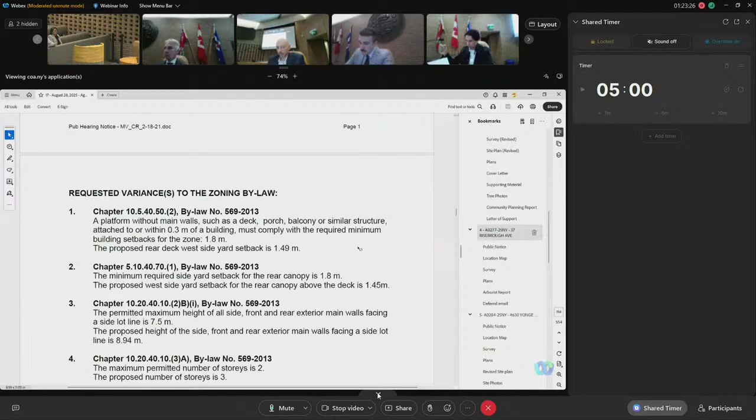All right, I understand you're seeking a request for deferral this morning? Yes, actually, one of the variances on the zoning notice is missed on the public notice, so we need to have the deferral and come back with the correct public notice.

All right, very good. Hold on there. All right, let's go into committee.

Mr. Knipfel. Thank you, Mr. Chairman, I'd recommend that the application be deferred to allow the applicant to come up with a complete list of variances. All right, do I have a seconder?

Okay, we have second, all in favor? Okay, that's unanimous, that is deferred. Second by, thank you, Mr. Marziari, for the record.

Thank you. All right, we have another deferral request, item number 7. Committee, Charlie Smith, 3 Church Street, Suite 200, Toronto, Ontario. I'm the agent for applicant for item 7, 2851 Yonge Street, and requesting a deferral today.

All right, the reason for your deferral? We've been in contact with Committee of Adjustment staff and in receipt of a city staff report, as well as various letters from the adjacent community.

And we'd like to request the deferral to take time to explore further revisions to our proposal, engage with city planning staff and the local ward councillor on how to proceed with the application. All right, hang in there.

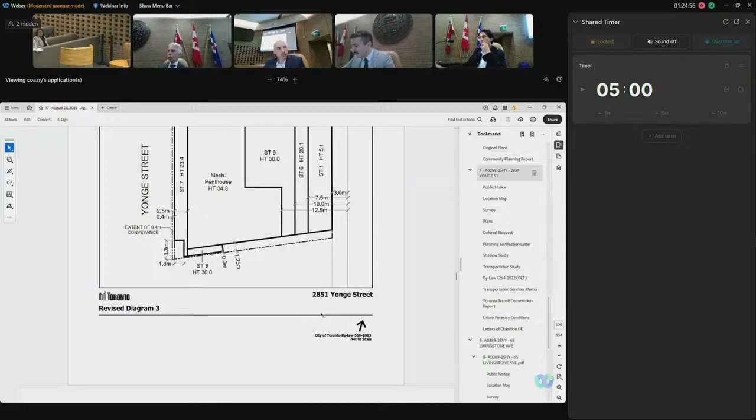We have two more residents, someone in person actually I see on my list. Is there anyone in here to speak to this item in person? Mr. Hewitt, come on down to the mic, please.

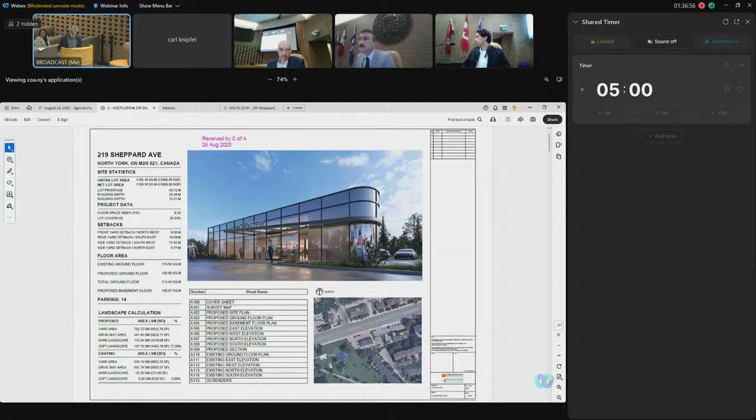Sure, yeah, staff, I can speak over the site plan, and then hopefully respond to the next page. Sorry, the site plan, I think it's going to be the next page, if they can. Yes.

In this revised site plan, we also show clearly the 2.776 meter road widening requirement. We clearly reserve that for future widening, but as part of our extension to the existing building, we still reserve it, and it's going to be dedicated when it's needed.

At the bottom right corner of the site plan, we locate the garbage bin, and the garbage is going to be stored in that location, similar to the adjacent commercial plaza on the east side of this property. They are also storing their garbage over there, and as needed, this garbage is going to be removed at least 3 times a day, 3 times a week, or even every day if needed.

That's important. The other comment they had was about food waste and storage issues regarding pest control. Definitely the owner is going to take care of that issue and maintain the site for pest control.

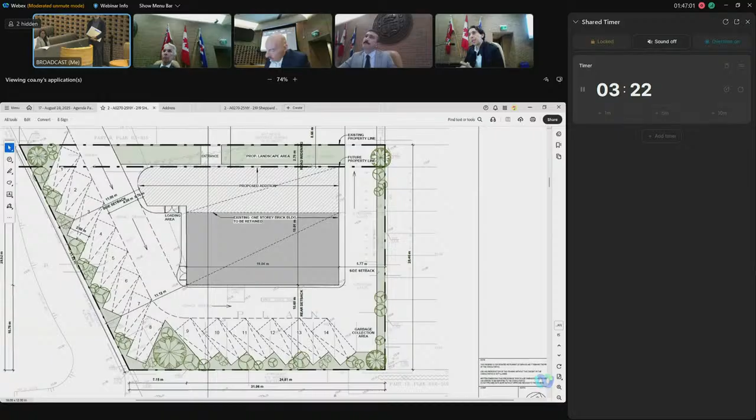Through you, Mr. Chair, I think it's a straightforward application. It's a common use along Sheppard Avenue East. There are many precedents along Sheppard, and I think it's a supportable application. So I'd like to put forward a motion to approve this application, subject to transportation condition and also TTC condition.

All right, do I have a seconder? Mr. Bartolo seconds that motion. All in favor? That's unanimous. You have your approval. Thank you, thanks for coming down today.

All right, item number 3, 28 Chatsworth Drive. The purpose of this application is to legalize and maintain the pool cabana in the rear yard and the front and rear yard landscaping. Three variances required: front yard soft landscaping, rear yard soft landscaping, and rear yard setback for an ancillary building. On file: material from the applicant, a letter of concern from 26 Chatsworth Drive, a report from community planning, and a letter of support from 27 Chatsworth Drive.

I see, yes, all right. Mr. Higgins, welcome back. Thank you for having me back. I am Peter Higgins of Peter Higgins Architect Incorporated, 69 Douglas Drive, Toronto.

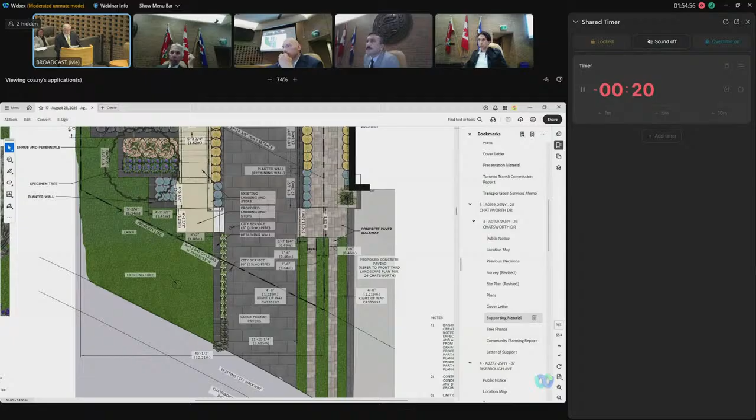So we believe that this proposal is in fact minor, and I'll just give you the numbers. I believe we reiterated them in our note. Very quickly, Mr. Higgins, just because we're over our 5.

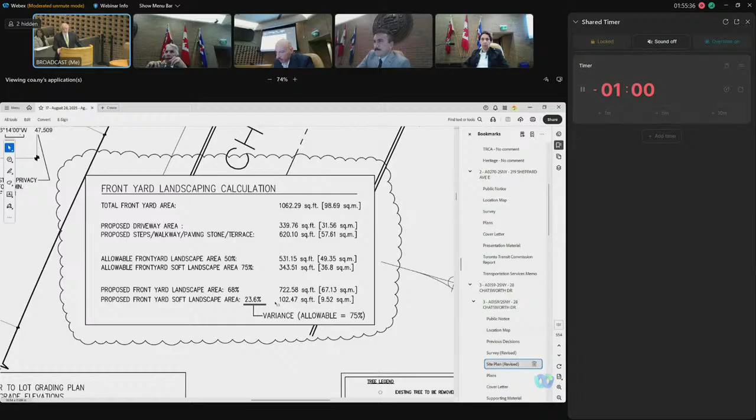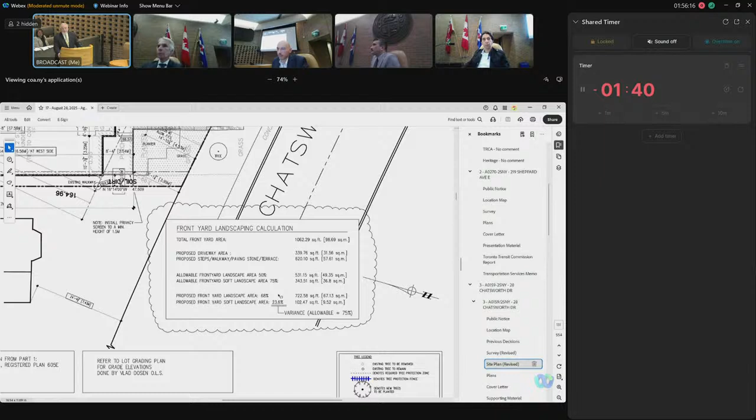All right, I'm gonna have to stop you there. I'm sure my colleagues may have a question or two. Yes, Mr. Knipfel. Thank you, Mr. Chairman. Mr. Higgins, could we get the site plan on the screen again?

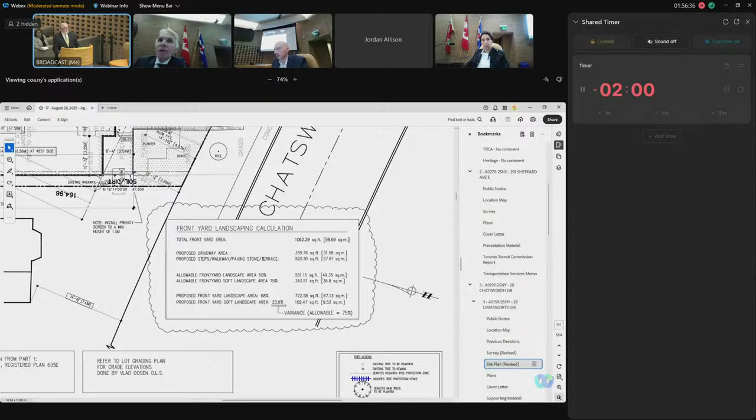The area you've noted as grass is in fact artificial turf, is that correct? And that's what the inspector saw. So he wouldn't have known it was artificial turf, he would have taken it as grass. So he didn't identify any variances relative to landscaping. Well, he did not. Okay, so if you were to remove the artificial turf from the rear yard and the front yard, would you need variances 1 and 2? Yes, because the numbers would be, as I said, 71.45, so close on the front yard. The rear yard would be 41.5, and that's because of the large patio area in the rear yard. That's the large patio area, yes. Okay, thank you.

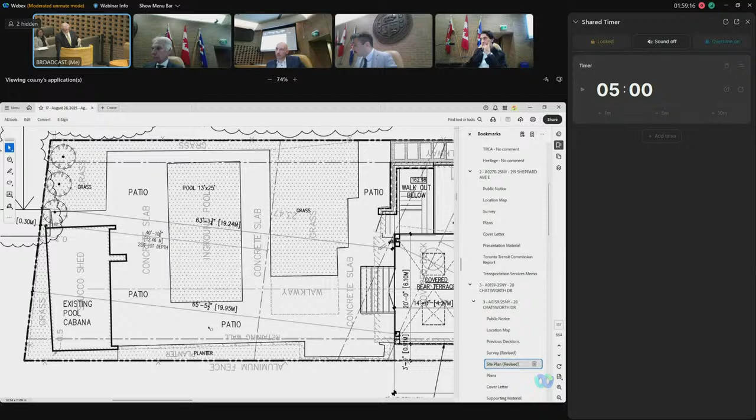I'll start it off, Mr. Chairman. I really don't have any difficulty with variance number 3, the setback relative to the cabana, particularly given the neighbor behind, the person most affected, doesn't have an objection. I do, however, have a lot of difficulty with variances 1 and 2, using artificial turf, and the percentages I just don't think are acceptable. I take Mr. Higgins' point that this wasn't done on purpose, not that that would really make a difference, but I think the applicant is responding in good faith. I'd be more inclined to suggest that variance number 1 be altered to 71.45% and variance number 2 be altered to 41.5%. It's not quite at the level of the bylaw, but I think in this case it's reasonable.

Yeah, thank you, Mr. Chair. I think I'm inclined to agree with my colleague. It seems like the applicant did try to do things in good faith, maybe got some bad advice, maybe made some incorrect submissions to the city and didn't get the required permits properly. That has happened. I think a reasonable middle ground to make all of this right is to proceed exactly like Mr. Nimfeld stated. We have a motion, see where it goes.

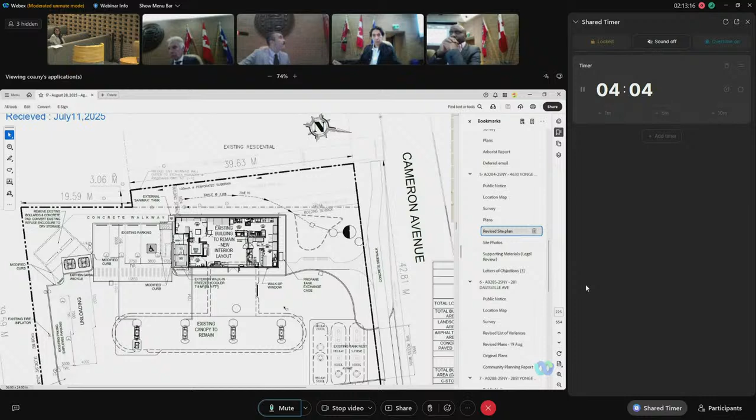We have reviewed the 3 objection letters, and I would suggest that 2 of the 3 are not in reference to what is being proposed here. One of them specifically makes reference to a proposed high-rise development at this corner, which is not what this development application is. I will say that we did have a pre-consultation application with planning staff at the very beginning of this process. They determined that a site plan application process was not required and that we needed to address simply the zoning non-compliant restaurant use for this specific C1 designation.

The last piece is the rear yard along Cameron Avenue is board privacy fenced, and there is significant mature plantings of trees. Okay, thank you for that submission. We have another speaker online.

Hello, hello, hi, can you hear me? Yes, we can. Okay, my name is Gari Shim, resident of 11 Cameron Avenue, which is directly adjacent to the gas station. So I do have several concerns with regards to this project. It's really an escalation of the existing issues that currently are there already.

The agent has referenced the green space between the gas station and my residence. There is foliage there; however, they have pruned or cut down trees that are looking directly in from the gas station's parking lot, at an elevated elevation. People can actually stand right by the fence and look into my backyard. The foliage that was once there has been pruned, and it doesn't really prohibit anybody standing there and looking into my backyard. So that's one in terms of privacy.

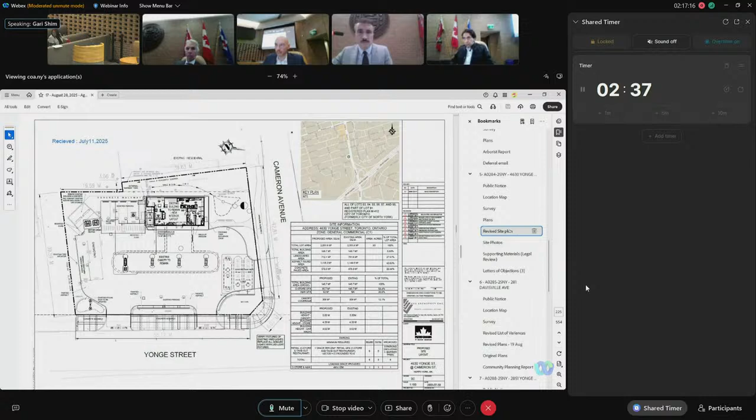Where would somebody on the applicant's property, at the gas station, where would that sightline exist? That sightline exists right by a bit of a little parking area with the garbage disposal area. If you look, it's kind of difficult to see here.

Staff have got the site plan up. Yeah.

So you can see the existing parking area there, right? There's a concrete walkway, and then there's the green space right behind it. Right where it sort of elbows in that corner there, it says external Sanimax tank there. My property borders, there's a fence there.

How tall is the fence? The fence is standard height. However, the elevation on the gas station side is higher, so it's actually shorter from a height perspective.

Are there any platforms back there that would elevate a person above the fence to look into your backyard? There is a brick platform there, and if you're over, I would say, 5 feet tall, you can look right into there. Now there are some trees there, but they've been pruned, and some have actually been cut down.

Okay. Any other questions? All right, thank you. Let's go back to the agent. I want to give him an opportunity to respond to some of the things that were brought up by the immediate neighbor.

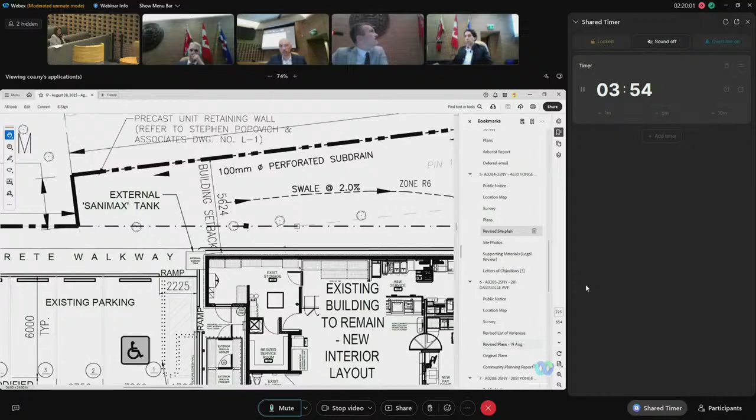Concerning the refuse system, it's a much more up-to-date version of the old bin system, where homeless and others would attempt to get into the garbage system. So it's designed to do a better job.

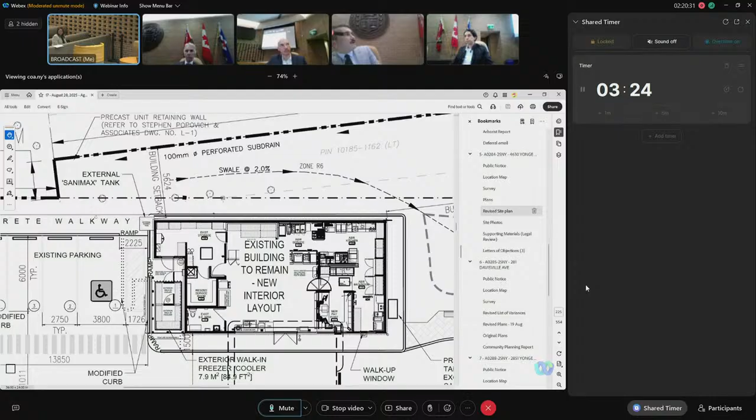All right, I'll ask you the same question I asked the immediate neighbor. In that concrete walkway, staff, if you just zoom out on that site plan, is it intended that this restaurant use is going to have anybody dining back there? Are there tables back there? Are you building a platform back there? My understanding from looking at this, who would be going back there on the concrete walkway typically? Would you have customers back there?

No. The purpose of the concrete walkway is to be able to exit vehicles, for example, and for staff to be able to get to the refuse system, which is to the left of that existing parking, to the garbage and recycling you see there. Okay, alright, I don't have any other questions.

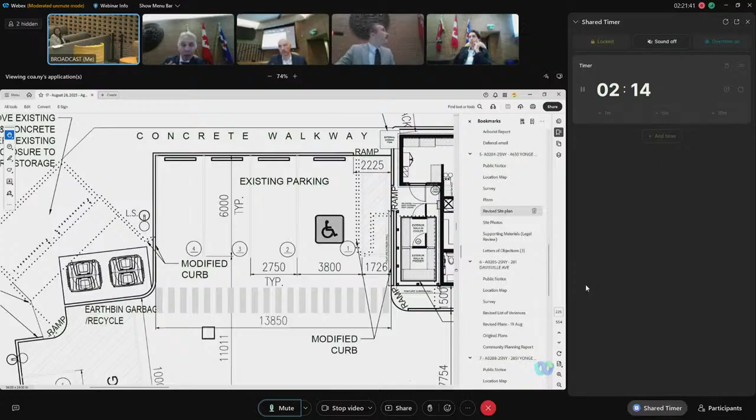Colleagues, do you have questions? Mr. Knipfel. Thank you, Mr. Chairman. Could you clarify, I understand this is a change in use and it's a minor change, but the one area that does appear to change is that triangle we were just talking about. Could you clarify, because I'm not clear, you're removing bollards and the pad, what's going in its place?

You've got to convert the existing refuse enclosure to dry storage. What is actually going to be there? And then are the recycling bins shown on your site plan, are they staying? I'm trying to identify what is going to actually happen where the dotted lines are about this new system. Is there a structure there? If so, how big is it? Certainly. And then is there still garbage recycling bins?

Okay, so certainly, today the garbage and recycling is in that storage shed. It has a roll-up door, and then the bins are moved out for the purposes of collection. That will be converted to dry storage for things such as pop, water, things which are not perishable, things which are dry for the restaurant and convenience store use. And that's today, all of that is inside the building, correct? That's a building, correct. How big is it? How high? It's roughly 9 square meters.

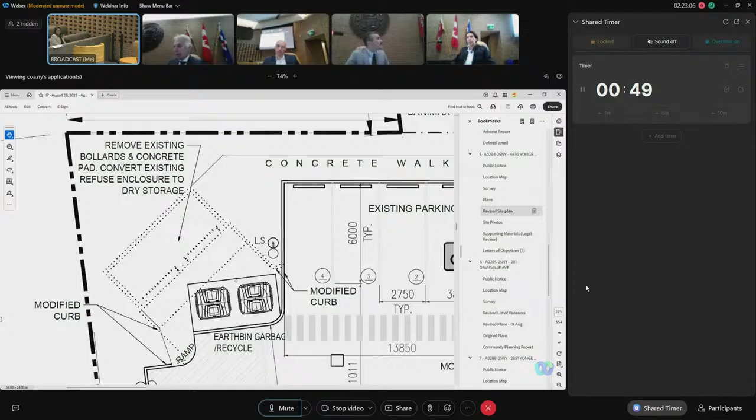Okay, and it's where the dotted lines show. Correct. Thank you. In front of that dry storage area, which was the previous refuse system, we will be putting in EarthBins. It's a product that allows recessed bins, one for garbage and one for recycling, which are picked up much like garbage bins. They are plastic, rubberized in nature, and recessed, so they would be sitting in front of that existing refuse storage area.

Okay, thank you very much for clarifying. You're welcome. Other questions? Okay. Thank you. Let's take this into committee now.

Mr. Bartolo. Yes, thank you, Mr. Chair. In reviewing this application, I don't really see any issues with it. They're not adding any space to the gas station. Restaurant use is pretty consistent in the area. It's on a main thoroughfare. Looks like they're handling the waste in an appropriate manner with, frankly, better containers than what they have now.

So I'm prepared to support this application. Other comments? If there's no comments, I'll put forward a motion to approve this application. Okay, do I have a seconder? Second by Mr. Kibu. All in favor? That is unanimous. That application is approved.

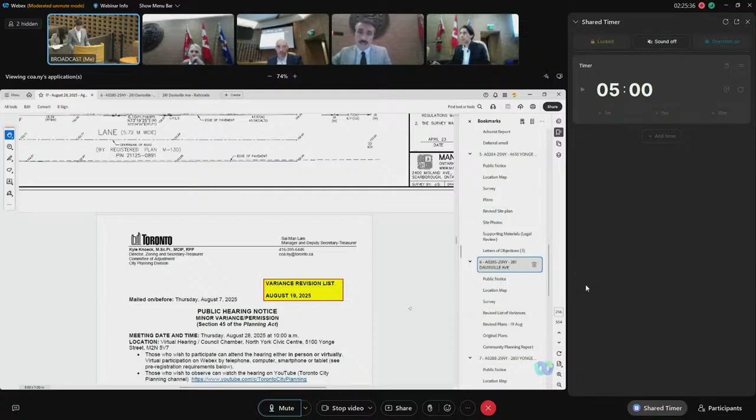The purpose of this application is to construct a 3-story fourplex and 2-story laneway suite. Variances for rear yard landscaping area, east side yard setback for a platform, front yard setback, east side yard setback, west side yard setback, building depth, setback for a rear exit stair, setback for front exterior stair, front yard soft landscaping, platform encroachment into a front yard setback, building height, front and rear exterior main wall height, and building length of a laneway suite. On file, material from the applicant, a report from community planning, we received a late letter of support with multiple signatures from area residents.

Welcome. Good morning, Mr. Chair and committee members and staff. My name is Christian Chan. I'm the agent on behalf of the applicant. My address is 157 Adelaide Street West, Toronto, Ontario.

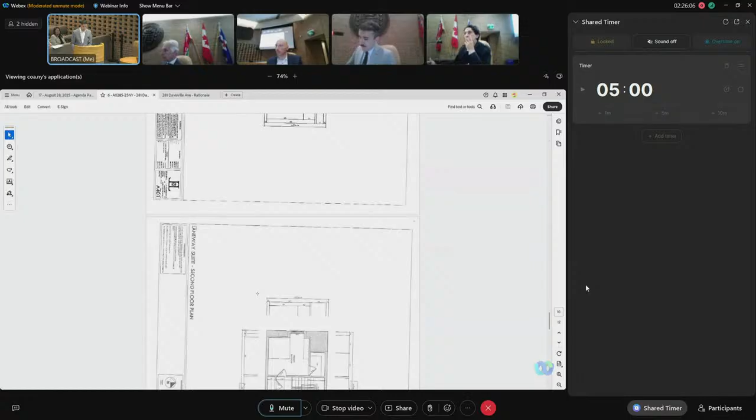And I'd just like to address a number of variances. There were active discussions between myself and Sina Sakaria of Community Planning, which resulted in a number of revisions and deletions to the variances list. I provided, and it's up on your screen too, sir, the revisions, which are also reflected in the planning staff report submitted last week, showing the modifications and deletions to the variances. So the list is contained in the staff report for the revisions. If you'd like me to go through them, sir, I can certainly do that.

Typically, we go through all of the variances from the public notice, but just before we do that, so everybody's on the same page: if I understand correctly, the modifications are in line with the recommendations noted in the community planning staff report, as well as the revised list of variances that were submitted. It's essentially a markup to the public notice, where you've noted what changed, what's being revised, and what's being deleted. That is correct, sir, yes. Okay, and that is in line with the community planning recommendations? That is correct, all except for item number 11 on the planning staff report with respect to the front yard soft landscaping, which I can go into in my presentation. Okay, so there is one discrepancy?

Yes, item number 11 that you see on your screen from the planning staff report, that is something that was new to me when I accessed the staff report when it was sent to me by staff last week at the deadline. That's an item that wasn't discussed between myself and community planning, so that's news to me, and I'll address it in my presentation, sir. Okay, very well. So staff can record the modifications using the public notice, which we'll get up on the screen. Take us through each of the variances and let us know what, if any, modifications are being proposed.

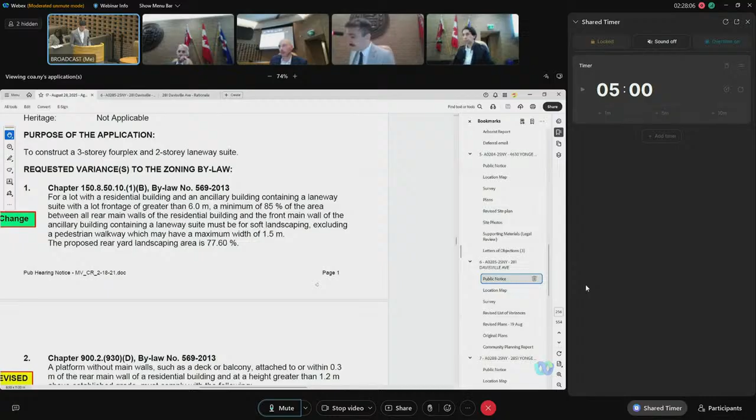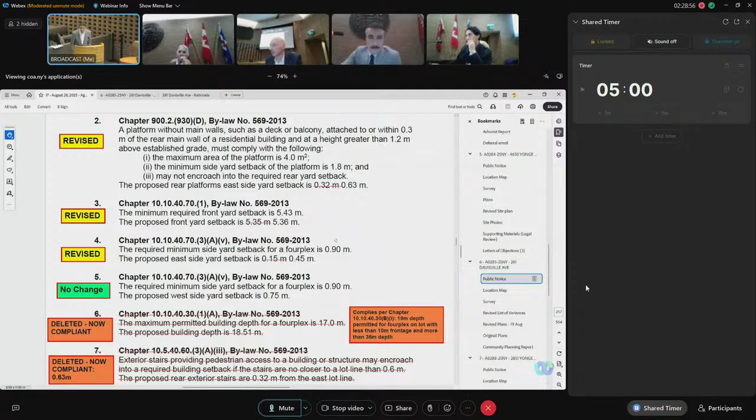Yes, so as we can see here, variance number 1, there's no change with respect to the rear yard soft landscaping area in between the proposed laneway suite and the proposed fourplex. The next item would be the platform encroachment to the east side yard, and since the plans were revised, you should have a copy of those dated August 19th, 2025, variance number 2 has been revised to reflect the increase in the east side yard setback of the proposed fourplex. Variance number 3, with respect to the front yard setback, because of some plan revisions, even though it's a very minor change, a revision to the requested front yard setback, it's going from 5.35 to 5.36.

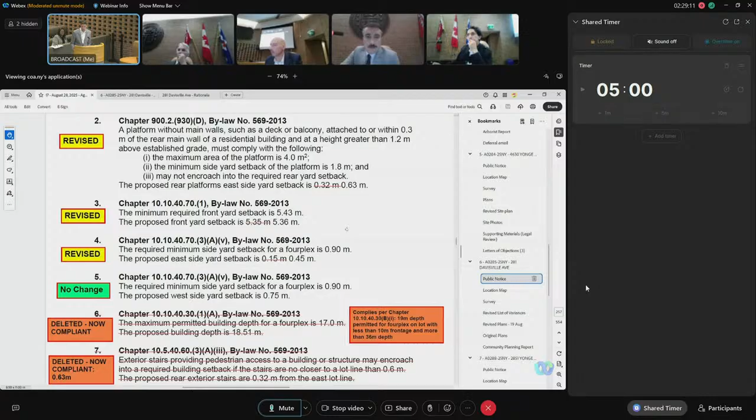Okay, variance number 4 is revised, reflective of discussions we've had. Just give us the changes, don't worry about the rationale at this point. So that's 0.45 from 0.15. Okay, variance number 5, there's no change to the west side setback. Variance number 6 is deleted, because in discussion... Doesn't matter, it's deleted, okay. Next one, number 7 is deleted. Number 8 is deleted. And number 9, sir, is no change. And number 10 is revised.

And then variance number 11. What's the revision on 10? The revision on number 10 was the encroachment of the front platform to the required east side yard setback. That's also reflective of the increase of the fourplexes. What's the numerical change for staff?

It's just right now we're doing clerical work, getting all of the changes. We can get into the discussion of planning rationale after. Understood. So the numerical changes from 0.39 to 0.84 for the required setback to the east for the platform. I also note on your submission, the platform encroaches 1.9 meters into the required front yard setback and is 0.84 meters to the east side lot line.

So there's two changes to that? There's two changes, however that's not reflected in what was provided in the planning staff report. They just mentioned one of the dimensions, the 0.84, but that's the deviation from staff. Okay, we'll get to number 10, right?

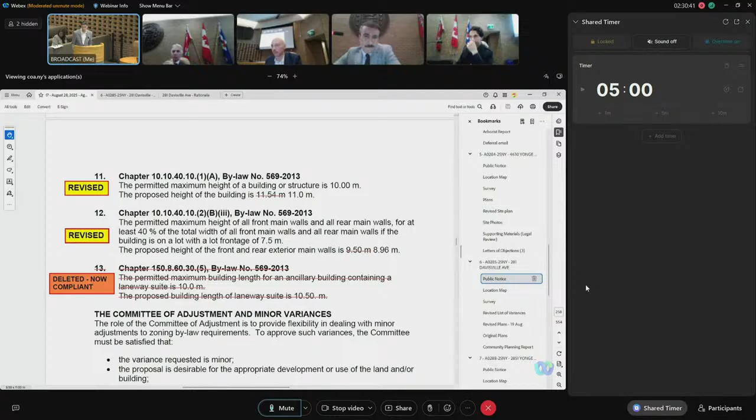Okay, and then number 11 for height, going from 11.54 to 11 meters. Revision for number 12, front and rear main wall height from 9.5 to 8.96. And then deletion of variance number 13 for the laneway suite, which is now compliant.

All right, staff, did we capture all that? I know you have it on the revised, but for good measure, we're supposed to have it on the record? Yes. There's still the one. Which one is it? Oh, from staff, the deviation? He said he didn't have it. He just got it, he didn't have a chance to.

Yes, this would be the front yard soft landscaping, variance number 9. I see, okay. And are you amending that, or is that staying? So staff have recommended in the report to go to 60% from the proposed 45, but that's something I would like to discuss. Okay, we will address that.

Okay, we've got the modifications. I think, given frankly the number of variances and modifications, a presentation would be helpful. I also think my colleagues may provide some of that rationale through questioning we may have. So you may not need a full presentation, but just to get the ball rolling, let's get the clock up, and I want to give you the floor.

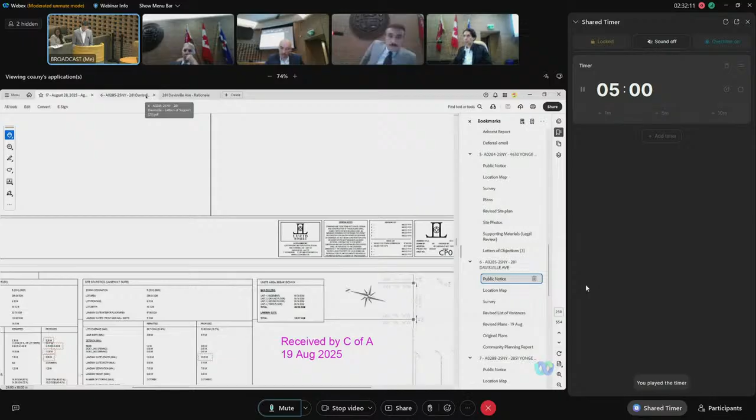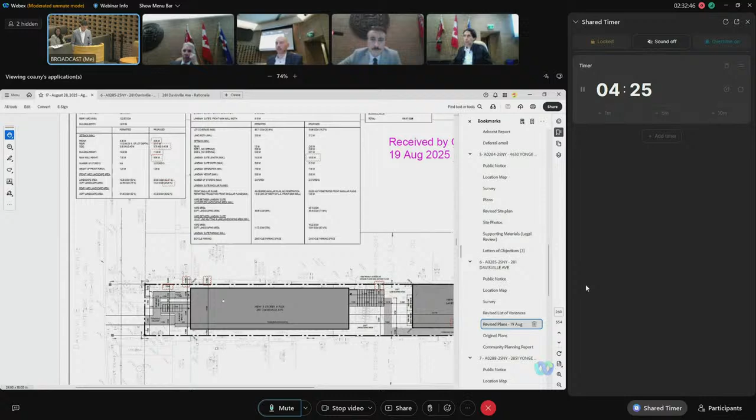With respect to the variances, I'll go into revised variance number 2 for the rear exit staircase. If I can ask staff to go to the site plan in the rear yard and show the staircase, that'd be great for the latest plan submitted. So the platform encroachment is revised to 0.63. The impact of this variance, in my opinion, is minor, as the platforms referred to in the variance are those for stair landings on the rear exit stairs and do not function as a deck or patio. They're not usable space.

They're also designed with porous metal grates, so sunlight will be able to go through this, as well as rain. And also in terms of massing, it doesn't appear as a portion of building mass because of its design. I've seen how the applicants have constructed other multiplexes with these rear staircases, and light goes through them.

With regards to the front yard soft landscaping, city planning has recommended that it be revised to 60%. I would just like to advise the committee that variance number 9 is still being sought. Sorry, I jumped ahead. Moving to revised variance number 3, the front yard setback. The proposed front yard setback is less than 10 centimeters than the required front yard setback, reduced by 7 centimeters to accommodate the fourplex.

As can be seen on the site plan, the adjacent homes have front porches that project beyond what is being proposed. With regards to variance number 4, the east side yard setback has been revised to 0.45 meters, and since there are no openings on the east main wall, this is compliant with the bylaw. However, the variance remains to be sought, and for belts and suspenders, I would not like to delete that variance.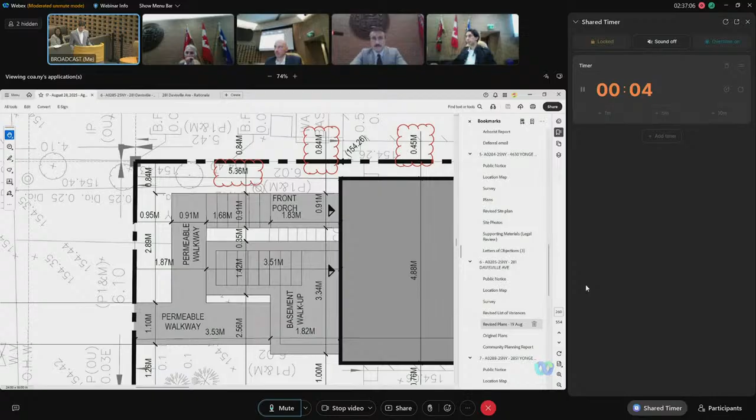If I can ask staff to go to either of the side elevations on the screen—the reduction in the impact of the height increase being sought is mitigated by the pitched roofs at both the front and rear main walls, a design that has been influenced by yourself, Mr. Allison, on previous fourplex applications that my designers have taken into account to implement.

And I think there's one more variance regarding the laneway suite, if I can ask for a brief indulgence. The proposed rear yard landscaping area is 77.6% between the lane suite and the fourplex. If I could ask staff to go to the site plan.

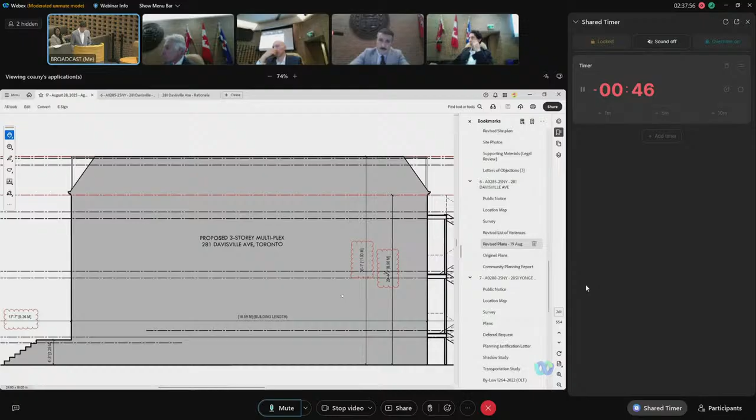Again, speaking to the soft landscaping reductions, yes, in the front yard, and in my opinion, a minor 7.4% reduction in the soft landscaping area between the laneway suite and the fourplex. However, we also have the lane suite increased over the permitted minimum to the rear laneway at 2.65 meters to increase soft landscaping in the rear yard, which interestingly, because there's a laneway suite, is not accounted for soft landscaping, but a new tree is proposed to be planted in that space as well.

Just be mindful of the clock. Final words—here we're good? I think that's it, sir. Okay, thank you, all right.

Let's, right now—we have some other speakers, but before we get to them, I'll ask members if they have any questions. Mr. Bartolo? Yes, thank you, Mr. Chair. For the agent here, two questions.

I just want to provide a summary. So with regards to front yard landscaping, it's my understanding from what you've said here today that it's not possible because for your porches, stairs, and ramps to be Ontario Building Code compliant, you need to consume that space to achieve that, correct?

Typically if there weren't an accessible unit proposed in the fourplex, namely that basement unit, then the permeable walkways could be a narrower width. But since a wheelchair accessible unit is being proposed in the basement, there's a requirement for a minimum 1.1 meter walkway.

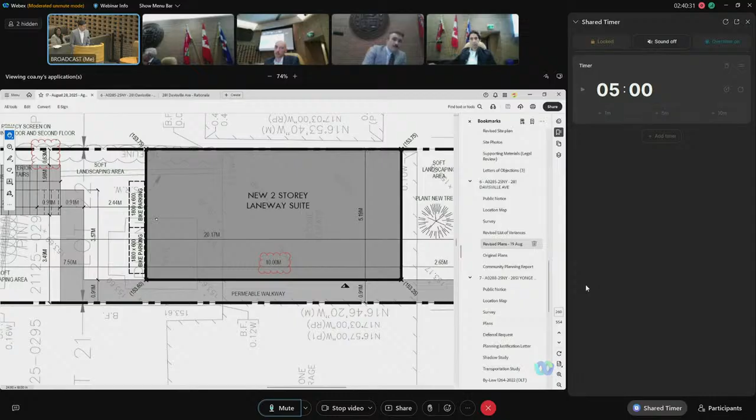So if I could ask staff to go to that portion in the rear yard on the site plan, that portion in between the laneway suite and the fourplex. If you can scroll a little bit to the left there, just show both building forms.

Okay, sorry sir. So yes, you can see there, this is the 77.60% soft landscaping in between the lane suite and the fourplex. However, those exterior stairs you see aren't solid stairs in terms of there being no water or sunlight that can go through them. They're in fact going to be comprised of metal grates, and below those exterior stairs is going to be soft landscaping, but once the zoning examiner calculates it, they won't calculate it as soft landscaping because it's covered by a staircase element. Yeah, I see what you're saying.

But otherwise, if I refer to the west elevation, I can see the stair layout, and so you're saying underneath those stairs is going to be landscape area where water can penetrate. It's just when you look in plan view, it doesn't reflect like that. That's correct. And also to add to that, sir, the portion of the south end of the lane suite going into the lane, that also is an increase in soft landscaping in the rear yard as well. I see. Okay, that answers my questions. Thank you.

Could you explain where's the bin storage for garbage, and how do those bins get from wherever they're proposed to the street? Yes, so for bin pickup, Davisville Avenue is a collector road, so that's why the laneway in the rear of the property is used for garbage collection. So the intent of increasing that rear setback of the lane suite to 2.65 meters, that's 1 meter over the permitted minimum setback...

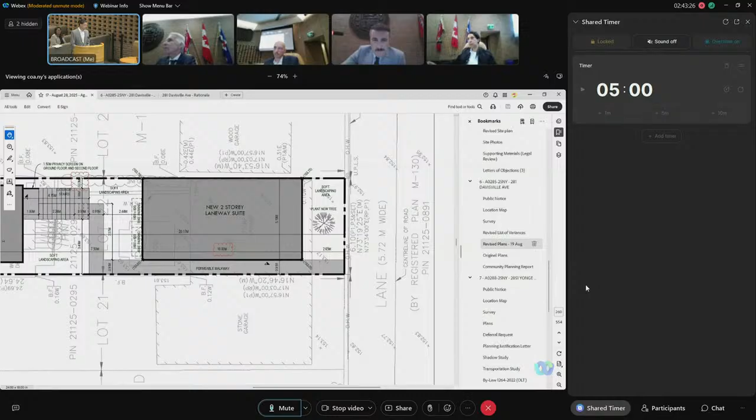Okay, Mr. Nipfel. Thank you, Mr. Chairman. Mr. Chan, could you explain what, if anything, you've done to mitigate the visual intrusion of that stairway? That's a large visual item to suddenly turn up in the property next door. Have you got any kind of screening along the sides of it? Something like a trellis that would contain plant materials or something to reduce its visual impact?

If I can ask staff to go to the elevations, I don't believe they're indicated on the plans, but should the committee decide to approve this application, I would be happy to have a condition for minimum 1.5 meter opaque privacy screening. That has been applied in other applications that have been before you on similar multiplex designs.

So where would that occur? You mean along the entire? So typically, sir, they would appear along the platforms of the staircases. That has been provided as a condition of other approvals for similar designs, so that there's no overlook from the platforms themselves.

As an alternative, would you not prefer something like an open trellis work attached to the whole side of the structure with planting on it? I think that would look absolutely wonderful, sir, and if that's a condition to apply as well, as a form of privacy screening, we'd be happy to have that as a condition. Thank you.

Other questions? Okay. Mr. Chan, you could step down. I'd like to hear from, I think there's some other people that came down today to speak to this item. Is there anybody here in person? All right, staff, we have some people online.

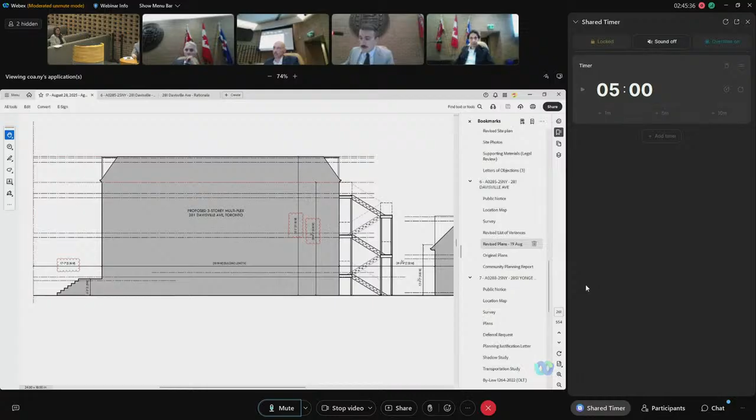Through you, Mr. Chair, we unmuted Kimberly Silk. You can talk. Ms. Silk? Hello. Hello. I'm neighbor of 281. Your name and address? Are you calling me? I'm not sure if you're calling me. Yes, you are the next neighbor. You can introduce yourself by giving us your name and address.

Oh, hello. Good morning, everyone. Our names are Sam and Bonnie, and we are the neighbor of the immediate adjacent property. Our address is 279 Davisville Avenue. If we may request a deferral of this application, because it's a huge project, as you can see, and there's a lot of variation in regards to the land and distance. Being the immediate neighbor of this huge project, being 5 units in total, we were just notified just a little over a week ago from today. And we've been having difficulty accessing the online details of these 5 units.

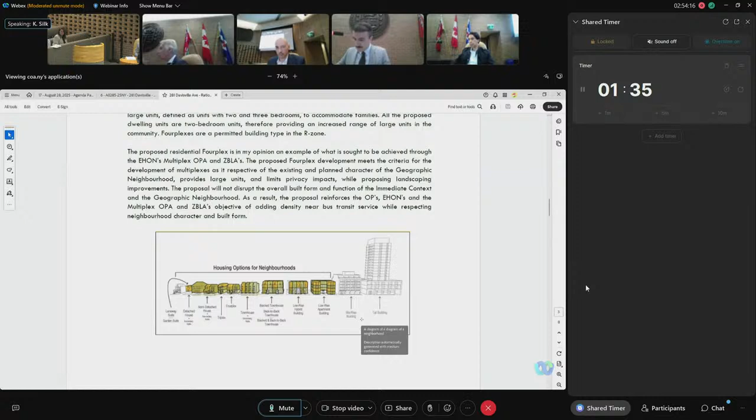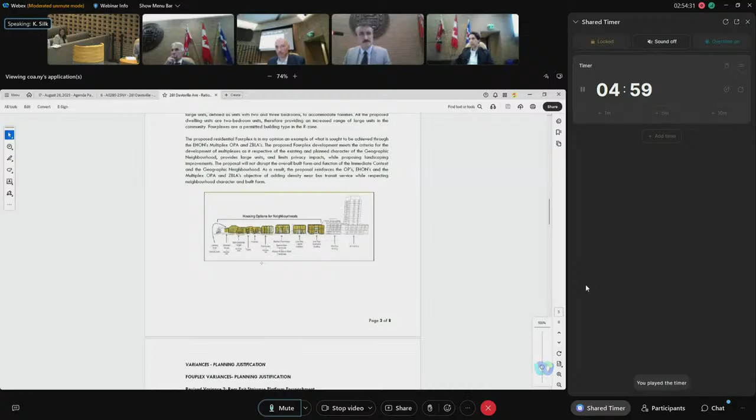Hello. Hi, my name is Jeffrey Pfeffer. I'm a resident at 289 Davisville. Kimberly Silk had to leave for a doctor's appointment, so I'm able to speak on her behalf. I just have one concern regarding the height of the applicant's design.

Generally on the street, most of the residences are two-story, and I believe that height would be setting a precedent, at least for that stretch of the street, and would be a little out of place with the general streetscape in that area. So I would like to hear how the applicant would address that.

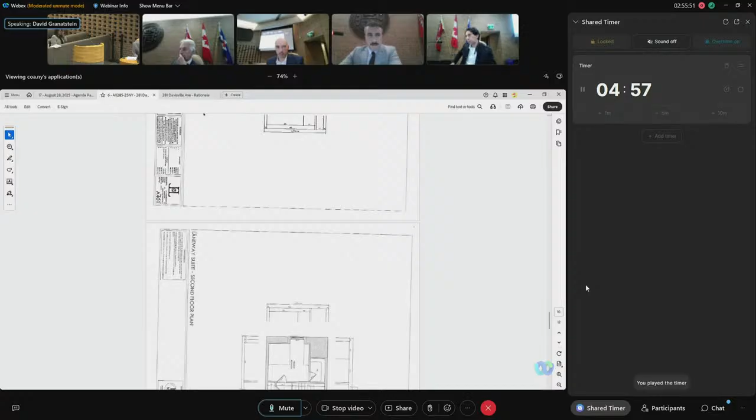I was just unmuted. My name's David Granatstein, and I'm at 386 Balliol Street, so across the laneway neighbor. Along with Jeff Pfeffer, this current building is actually one of the tallest ones on the street. You probably have the exact details if it is actually the tallest one, but it looks like it will be taller, so I've got a concern with that.

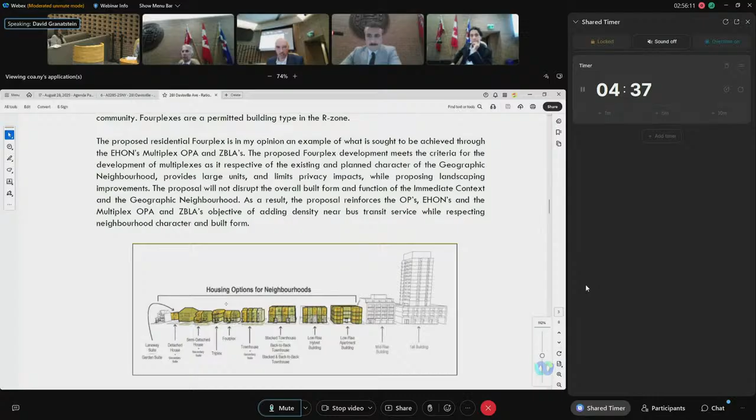The density in the area, so the space between the main building and the laneway suite seems to be too small. We already get lots of water, snow and things like that in the laneway, which makes it really hard to navigate. Unfortunately, as you know, laneways aren't a priority in terms of snow clearing. So I don't know how they're going to deal with extra traffic with garbage in there as well, but it also just prevents water from being absorbed naturally, so it will get funneled out into the laneway.

Additionally, with 5 units, that's a lot of people. I would love to think that everyone's riding their bikes and walking, but my guess is they're going to have cars. Curious to know where those cars will be parked with no garage or laneway space for parking. Already the neighborhood, like most of Old Toronto, is inundated with cars with on-street parking. The laneway itself has too many cars. We've got some neighbors who park their cars outside of their garage, narrowing the laneway even more.

Because their unit is kind of at the entrance to the lane, it also creates additional impact because of the snow, and when the snow needs to be cleared out, it is a one-way lane, a dead-end lane, so all the snow has to be collected from the end and pushed all the way forward. So with more and more people there, potentially putting their cars in the lane behind the laneway house, it's going to create additional traffic and congestion, especially if garbage is going to be picked up from that location in the laneway.

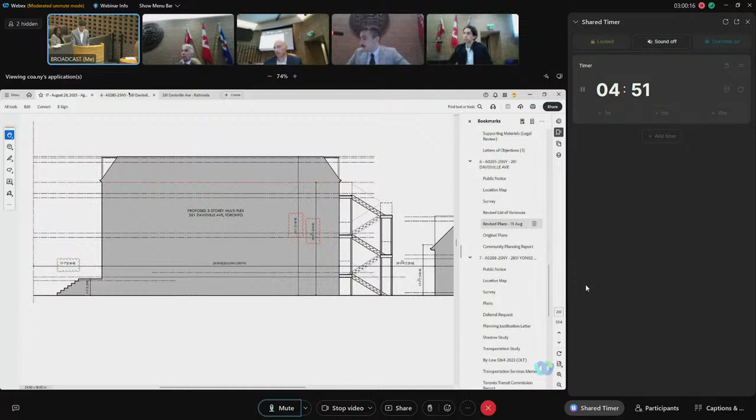With respect to 279 Davisville Avenue's concerns, I would ask staff to go over to the site plan showing the rear yard, and zoom in closer onto the lane suite, so I can show the built form relationship. 279's existing garage is abutting the property line, as you can see at the bottom of the screen.

The proposed lane suite is at a distance of 0.91 meters from that garage. You can also see there's a garage separation to the garage to the east. A lane suite is permitted to have a zero meter setback to the side lot lines, and in this case, in order to effect the permeable walkway, a setback is proposed that is completely compliant with the zoning bylaw provisions.

In terms of construction concerns with regards to the lane suite, I will ensure my client and the builder have discussions with the neighbor to address their concerns for digging and any structural impacts it might have on their garage. But these are matters that would be before Toronto Buildings for inspection, rather than concerns for construction that would be brought before the committee. With regards to the concerns for the west side yard setback impacting them...

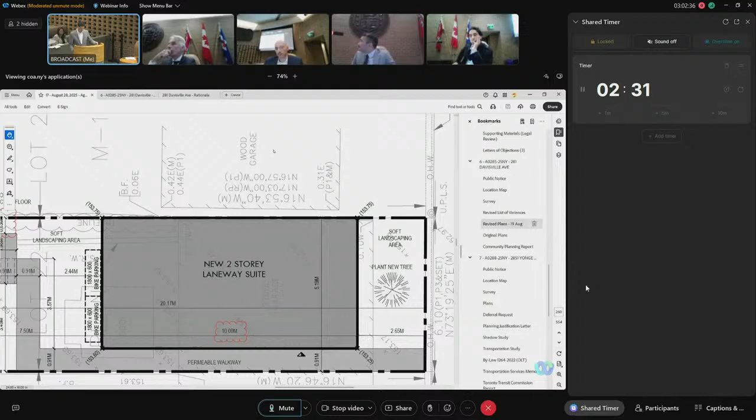289 Davisville's concern with regards to height: yes, the existing height context in the immediate context, a term provided in Chapter 4.1 of the Official Plan, is of two-story buildings. What's being proposed is a three-story building with an elevated basement.

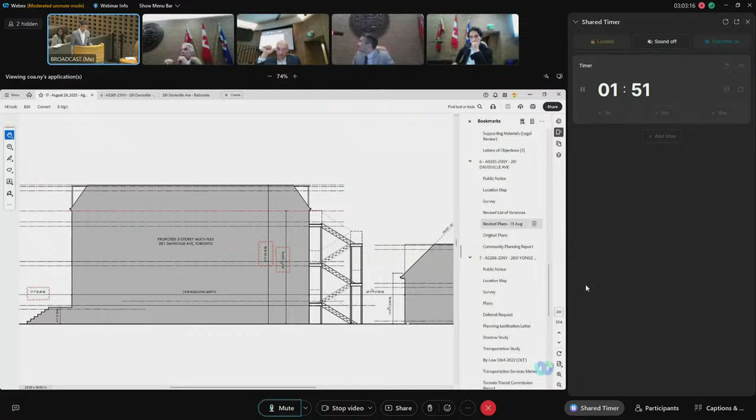I'd like to refer the committee to OPA 649, also site and area specific policy 826, regarding the multiplex Official Plan Amendment, which in fact amended the Chapter 4.1.5 policies with regards to prevailing height, which is normally applied where a development isn't a multiplex. In this case, the multiplex OPA applies and supersedes the Chapter 4.1.5 policy specifically citing prevailing heights.

City staff, when doing the EHON study and developing the multiplex OPA and zoning bylaw amendment, noted that in many contexts, new multiplexes would not be consistent with the prevailing heights in many neighborhoods in the City of Toronto. Therefore the policy was amended to accommodate the fact that triplexes and fourplexes would seek increases in height over and above the prevailing heights in the immediate context.

Therefore, we worked closely with planning staff when we originally went in with an 11.54 meter overall height variance, as well as a 9.5 meter height variance for main wall height, and reduced that based on discussions with planning staff.

With regards to the neighbor to the rear on Balliol Street, concerning density - neither the fourplex nor the lane suite is seeking any FSI, floor space index, increases. In fact they are excluded from floor space index, because city staff removed these regulations from the zoning bylaw for these types of development, to ensure it was form-based rather than a GFA-based metric for fourplex development and lane suites.

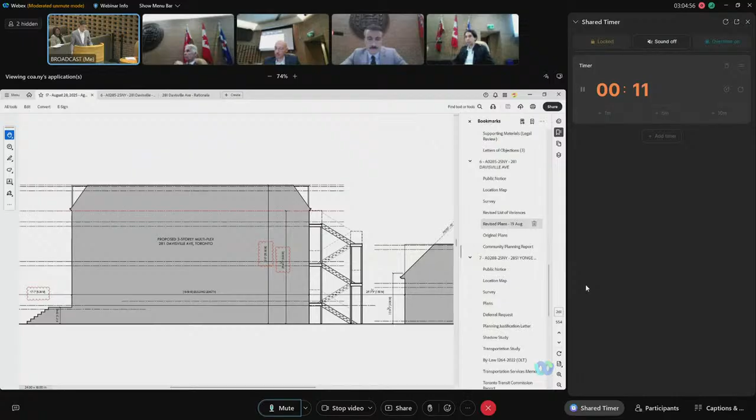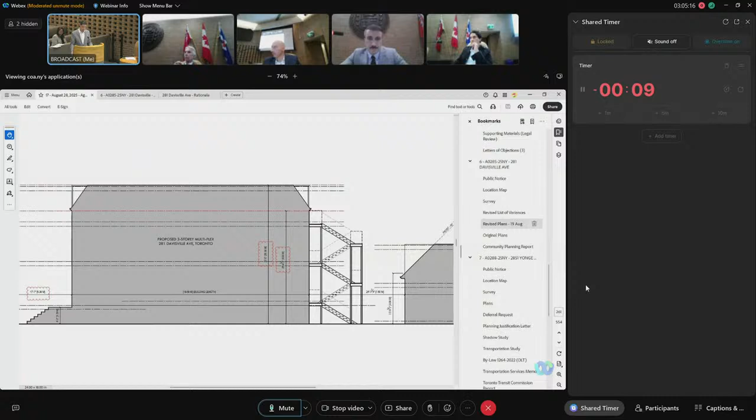In my opinion, the 5 units on the site is something that City Council is specifically encouraging through the reduction of development charges, the relaxing of the zoning bylaw provisions for especially rental fourplex and lane suite development throughout the city. This is an iterative process that has even changed at the end of June with the multiplex monitoring update, which also further amended the zoning bylaw provisions to stimulate this type of development across the city.

In terms of the area between the laneway suite and the fourplex, it's compliant with the bylaw with a 7.5 meter separation distance between those two structures. Therefore, my respectful submission to the committee, there are no impacts with regards to the proximity between those two buildings, as it is compliant with the zoning bylaw.

With respect to parking, there are no parking spaces required for either the lane suite or the fourplex pursuant to bylaw 89/2022, which amended the parking regulations in the zoning bylaw to remove the requirement for minimum parking for low-rise residential development. I'd also like to note that there is a bus route and bus stops immediately adjacent to or in and around the site, serving bus route 11, bus route 28, as well as Hodgson Public School.

Community amenities are right across the street, and it's within walking distance of the Davisville MTSA, that's now approved as of August 15th from the province.

Just get you to wrap up. I gave you an extra minute. Thank you, sir.

So with regards to garbage, the applicants have informed me, I had a chat with them, that there is property management. There is snow removal that's going to be provided at any time when there's snow. The garbage is also, I've just been informed as well, it's not just going to be city pickup, it's going to be privately removed through the property management whenever the bins are full, and handle grass and weeds on the property. And I think those are my comments.

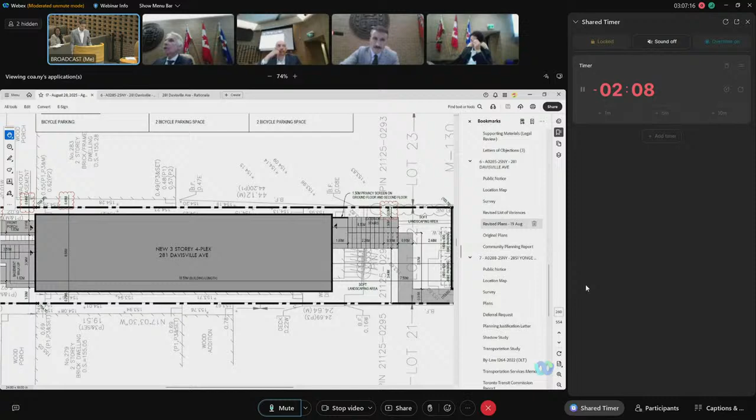Your site plan indicates that there be a privacy screen on the ground floor and the second floor, but not the third floor. You and I talked during your original presentation about an alternative, which I think would be preferable, instead of a solid screen, because I don't know that that's necessary so much as something to ameliorate the visual impact of this entire stair structure.

I suggested some kind of a trellis with planting might be a reasonable alternative, and I gathered you agreed with that. If that were to be a condition of approval, I would like to explore with you what the wording should be, because I realize we're not designing it here, but we could, without meaning to, end up tying your hands with wording that is so restrictive that unless you do it a particular way, it wouldn't comply. Have you got wording that you would recommend?

I'm just thinking of what the zoning examiners and buildings would be able to receive. We always know that opaque privacy screening is something definitely that they can understand. What we've been doing recently, and I think it's working well, is we removed the word opaque from that to allow for alternatives rather than a solid fence. I think that's reasonable because it allows for perforated metal and a number of other alternatives.

Yes, Mr. Niffel, I absolutely agree with you that a planting trellis would be more visually pleasant rather than opaque privacy screening. So I think the wording that should be used is a privacy screening.

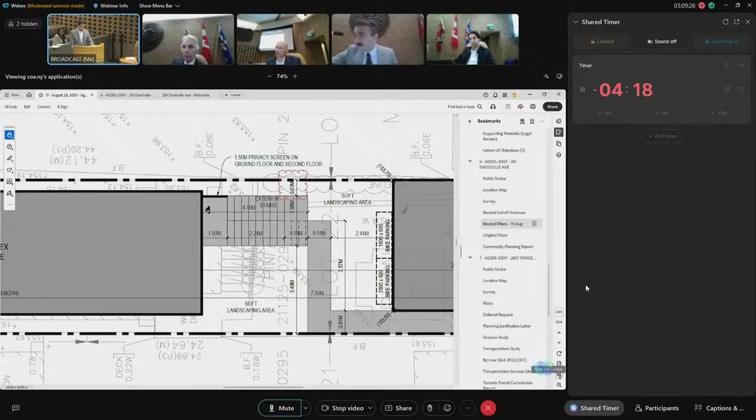Other questions? Okay, thank you very much. We've heard a lot on this file. Mr. Chan, you can step down. Let's take this into committee now.

I'll get us started. I just want to bring up one of the variances that came up. There was a modification to a side yard setback variance to increase to 0.45 meters, which I'm supportive of.

I'm a little hesitant, though. I think the applicant noted that the variance would not be necessary, but out of caution they'd like to include it. But what I don't want to permit is that 0.45 meter setback with any window or door openings, given that it's still only 0.45 meters from the property line. So I'm okay to leave that particular variance, but I would like to include some condition that doesn't undermine what that provision of the bylaw is, because it really cuts the 0.9 to 0.45 if there's no windows or doors.

And the applicant has proposed no windows or doors, but in approving that variance I want to make sure that none are added as a result of that variance approval, because that's what the variance would be doing. The side elevations should say windows and doors are as per the side elevations, or just say no windows or doors shall be permitted on that elevation.

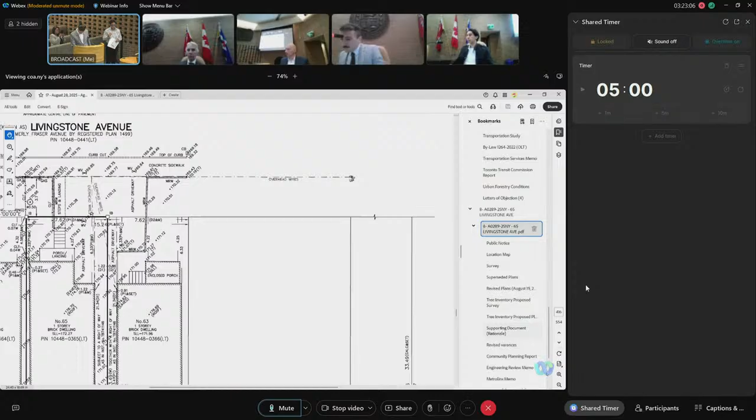All right, and we have our agent back, Mr. Chan. Welcome. Yes, the double header, sir. If you would like my name for the record: Christian Chan, registered professional planner and agent for the applicant. My address is 157 Adelaide Street West, Toronto, Ontario.

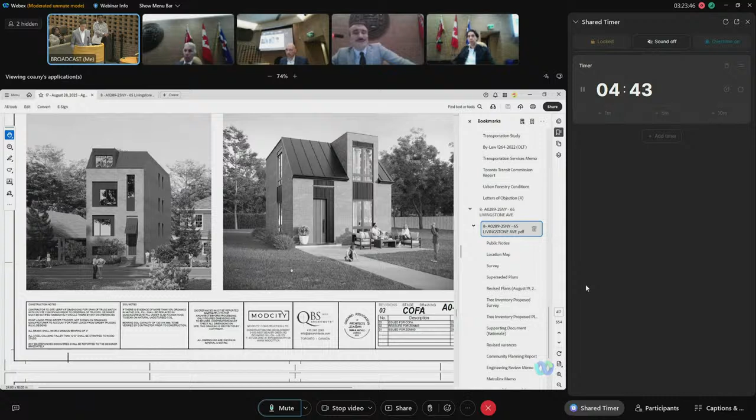All right, and we'll put 5 minutes up on the screen. I'd just like to address that the Application Information Center has been down for the past 48 hours, so I was unaware of any other objections other than the property to the east. All right, thank you for advising us of that. Staff, maybe make a note. So I would probably have to address those items on the fly. Yeah, so actually maybe let's start.

I've noted the items in the file. Let's put the letters of concern aside for a second.

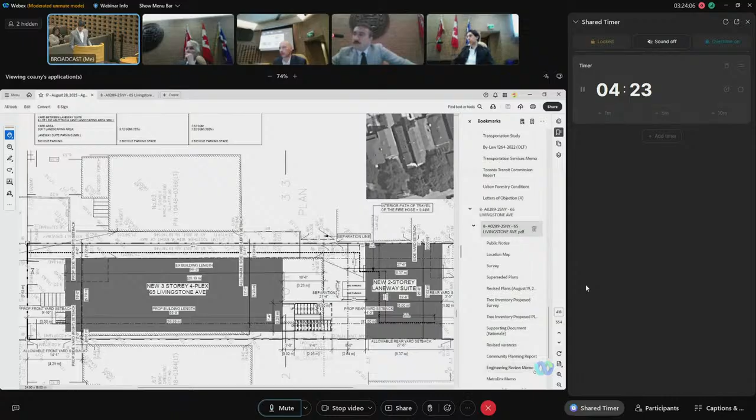Have you seen our community planning report, engineering review memo, or Metrolinx memo? Yes, I have. And just to advise the committee, there's a new revised set of plans that were submitted to the committee on August 19th. Those would be the revised plans I'd be speaking to. Could you say the date again? I believe those are the plans received August 19th. Yes, and we do have those in our original package, so those have been reviewed.

Excellent. So in speaking to planning staff, we have agreed to amend variance number 2 to 3.5 meters. That's the one revision in this file, along with the staff report.

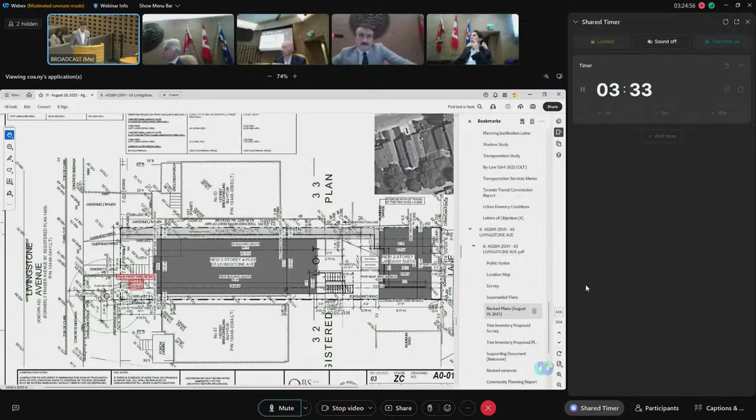And also, in consideration of what we just discussed on the previous file with respect to the rear staircase, the rear staircase in this case is compliant because it's in the RM zone, but I would heed Mr. Niffel's condition to apply that also to this file, should it be approved by the committee.

And then with respect to letters of concern from residents, have you seen any? Just the one, sir, from the adjacent neighbor citing construction concerns and an issue with their shared driveway.

We also have another speaker from number 63, whose letter you've read, so we'll be able to address that today as well. I was able to access number 63's letter. The others I have not received, but I'll attempt to respond to them. We'll pull those up, but on my speakers list I only have one resident from 63 to speak today.

My understanding is a lot of these concerns raised by one neighbor are often brought up by the next. Yes, in my experience as well.

And just to speak to the transportation services staff report, they're seeking a 0.67 meter conveyance to the laneway at the rear. I think, for consideration of the committee, I've discussed this with my client. My client is happy to oblige, but I would provide my opinion to the committee.

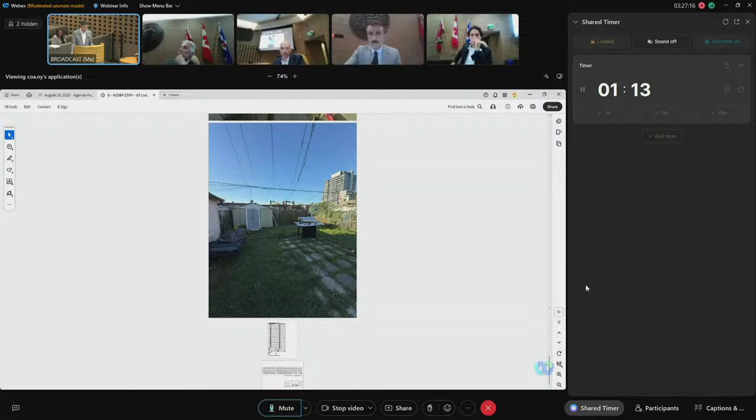On top of that, I understand the official plan policy directive for a 6 meter lane widening. There's a CR zone directly to the south that may be developed with mid-rises or other higher orders of development in the future, given this is within two major transit station areas now approved by the province. A laneway widening on the north side to the RM zone would probably take a very long time. The only opportunity for the city to request a lane widening is at the time of a planning application—subdivision, severance, site plan control, minor variance, et cetera—and I don't believe it's something that would be feasible.

Again, I'm in the committee's hands should they heed transportation staff's request to impose that condition, but I don't think it's a realistic probability, and it could seriously affect construction of the proposed laneway suite should it be approved. And you've obviously been having ongoing discussions with them.

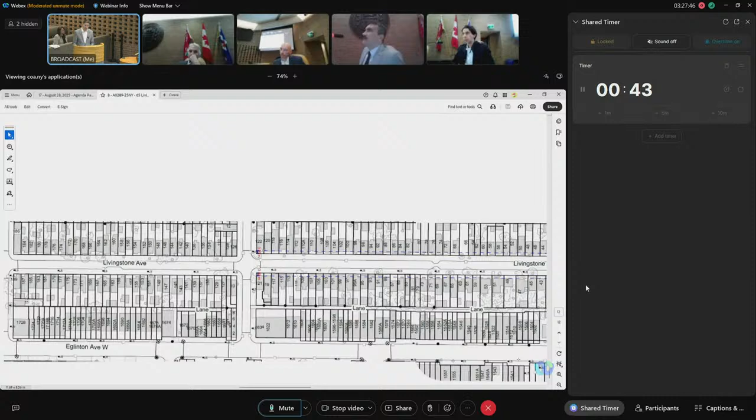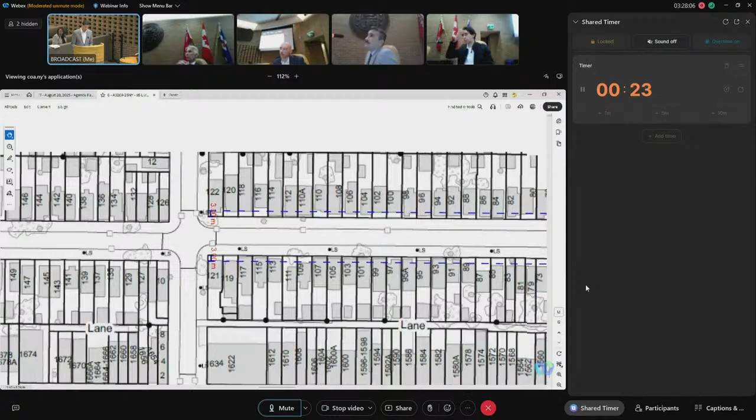Have you got a response with respect to the concerns raised about the grade change and the retaining wall that may or may not be required to facilitate the widening? I've attempted to reach transportation services, sir, on 3 occasions without response, explaining the situation and sending them the photos as well. We can continue to have those conversations—it's something they may actually impose at the time of the building permit as well. But at this time, I think it's...

It's a reach to think that a 0.67 meter conveyance would not affect the proposed development, and in fact it is driving some of the variances as well, specifically with regards to the laneway suite being proposed closer to the fourplex at a 6.5 meter distance, in order to address potential structural issues with slope failure and geotechnical engineering that would pop up.

And also, the city would have to build a retaining wall in that specific portion, and unless there's an expropriation plan for all the lots along the RM zone and those along that strip, I don't see how it could be feasible to effectively construct that lane widening in the future, rather than taking it from the future development of the commercial residential zone to the south.

Okay, was there any discussion or thought about addressing that grade change through the construction of the lane suite? You're putting a building at the back of the property, so you could essentially deal with that grade change through the building itself. However, in terms of cost prohibitiveness for the lane suite, and because of the grade change, the lane suite is not in effect a lane suite - it'll be a garden suite.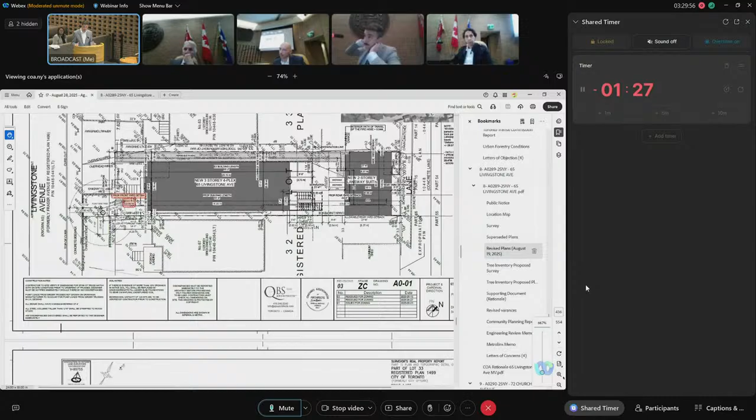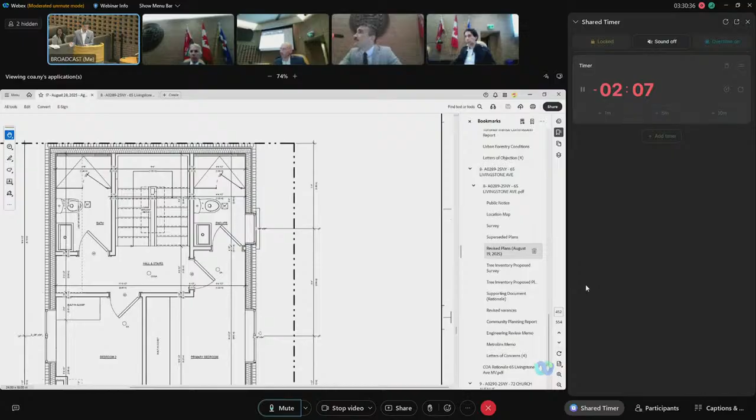Another factor driving the angular plane penetration for the lane suite on the north side is that the designer wanted to place it away from the slope. We're seeking a 6.5 meter separation distance, but the lane suite can't be wider than the 6 meters proposed, which is 4 meters less than the permitted maximum length. So it's an undersized lane suite due to the site's unique physical context, and to have usable floor area on the second floor that's 40% less than permitted, there's penetration of the rear angular plane on the north side facing the fourplex.

So there's essentially no connection intended from the rear of the property to the laneway, since you've got a retaining wall there. So there's no walkway, no doors exiting that would facilitate access at the rear.

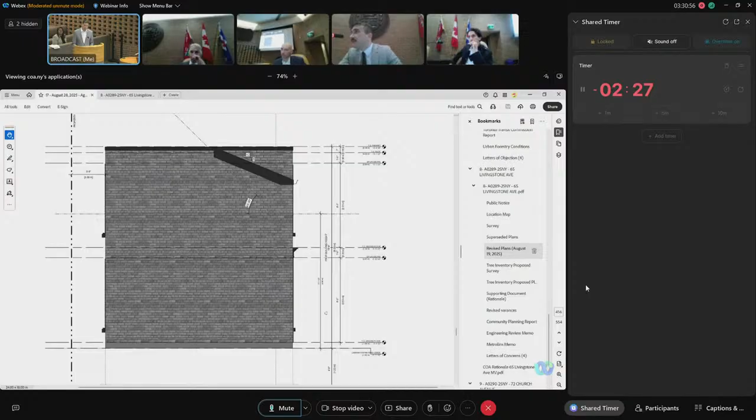Yes, sir. And if the conveyance is approved, there would have to be encroachment agreements between my client and the city in order to affect landscaping changes if they're constructing a retaining wall, which could also present itself as a barrier to having staircase access to that laneway.

Okay, very well. Any questions at this time?

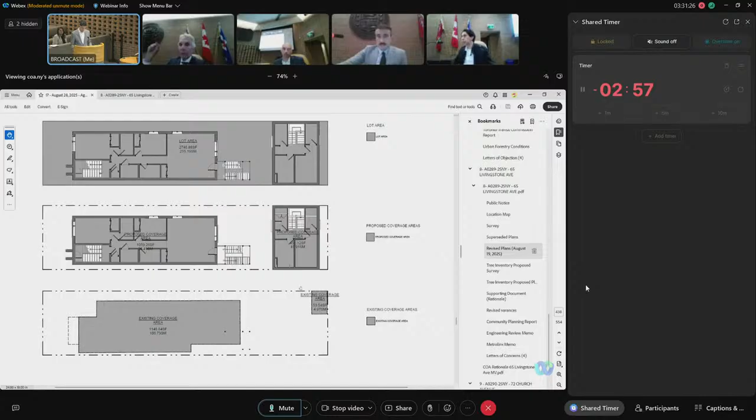Yes, Mr. Nipville. Just one thing flowing from the last conversation. That strip of land adjacent to the lane and adjacent to the laneway suite - you can't access that? That's correct, and therefore... So it can't be maintained?

That little space there will just be used as soft landscaping, as a buffer to the slope. But nobody can get to it to maintain it. I don't think so, not without... that's a good question, sir. They could technically go through the lane, they'd just have to go around - I'll check the floor plans. It would make sense to put some permeable pavers in instead, since nobody can get there.

Okay, thank you. Other questions? All right, okay, thank you. We do have another speaker in person I'd like to hear from.

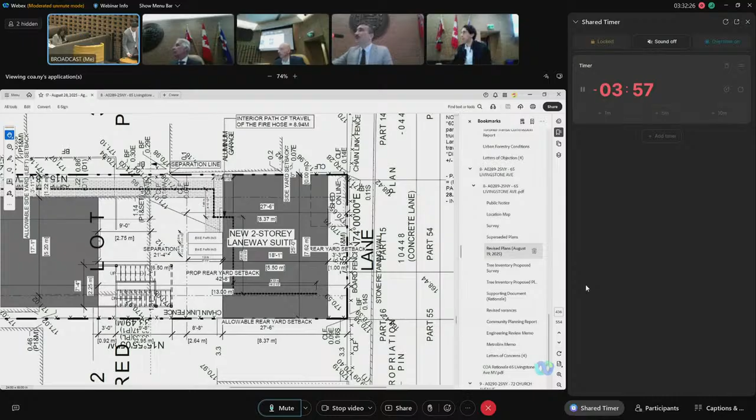Welcome, please come down and tell us your name and your address.

Good afternoon, Mr. Chair and the Committee of Adjustment. My name is Maritas Garcia, resident of 63 Livingstone Avenue. I'm here to address a lot of concerns regarding 65 Livingstone Avenue, to construct a huge project - a 3-story fourplex and a 2-story laneway suite at the back. Since this is a shared driveway, I've lived here for almost 18 years, in a detached bungalow, in a very quiet neighborhood.

But the problem is our street is only one-way, and the parking street is very congested during the winter time. So if the construction goes ahead, especially the laneway suite at the back, our concern is the boundaries, the wall - how should they protect it to have a strong foundation to avoid soil erosion? And also, since this is a mutual shared driveway, how many people will be walking in a quiet neighborhood? How about if the construction goes through?

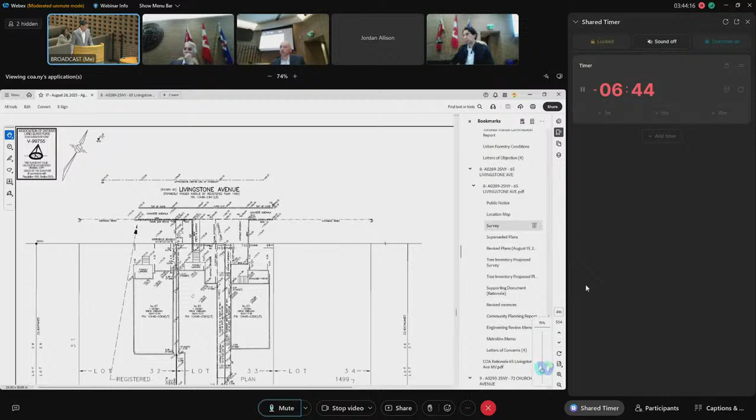Thank you very much, I'm going to turn it back to Mr. Chan now, to give him an opportunity to address some of the concerns raised by his neighbor. Yes, absolutely, and I thank the neighbor for the comments. I'd like staff to please pull up the survey so I can discuss the right of way — it's in the set of plans there too. There we are, so as you can see on the screen, sir, and committee members, there is a 1.22 meter shared right of way.

There's an instrument for it, 1.22 meters on either side, and that's to provide access to the rear garage on either property, especially number 63, where that garage is going to be maintained. So as part of the proposed plan, the 1.22 meter east side yard setback is going to be maintained and not encroach onto that right of way as required by law. With respect to construction matters, I will have the building and project manager speak with the neighbors — they're here today — so a productive discussion can occur after the committee considers this application. Foundation walls can be discussed again, as you mentioned, sir.

These are matters that go before Toronto Buildings. In terms of how many people are using the right of way, I believe in the past vehicular access from number 65 would traverse that right of way. However, there are no parking spaces proposed on the site, and therefore there will be no vehicular impacts to that right of way — in fact, it's going to be improved by my clients. Again, a discussion can be had between parties just after this to see what the nature of the landscaping treatment would be for the right of way, or to improve it.

Does the neighbor use it for vehicular access? Perhaps I should have asked them, but it appears so because there is a limited garage to the rear. If you still use that driveway for vehicular access, just a yes or no. No more. No more. Okay, because when we bought that house, the front part, we had the front yard parking here. So, no more.

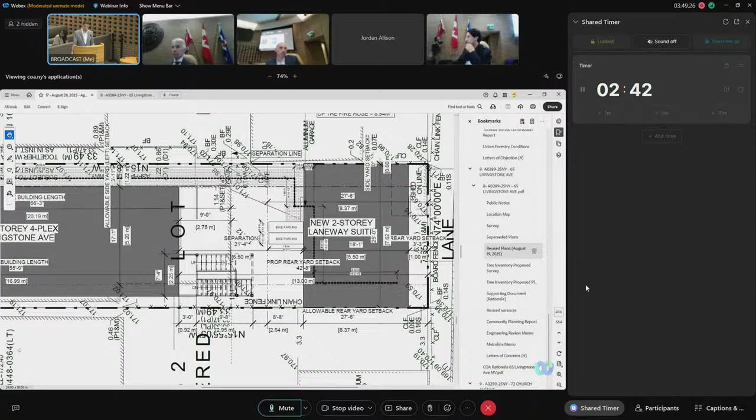Thank you, Mr. Chen. I'm going to take this into committee now for brief discussion and get a motion for you. All right, let's go into committee now.

Yes, Mr. Maggiari. Thank you, Mr. Chair, and through you, I think it's a supportable application. It's similar to 281 Davisville with less variances. I think in general it meets the four tests, and I'm ready to make a motion if my colleagues don't have any further comment. Just a brief comment.

I'd ask if we were to approve variance number 1 for the height, that it be tied to side elevations to ensure that those beautiful angular planes on the front and rear are maintained, to help address the massing that would result from the additional 0.54 meters in height. If that's okay with you. Yes.

So with that being said, I think I can put forward a motion to approve this application as amended. So variance number 2, front yard setback to be increased to 3.5, and also variance number 1 to be tied to side elevations. We also included the privacy screen for the rear exit stair on both sides along the stair, and I would include the engineering conditions, the four conditions, into the approval.

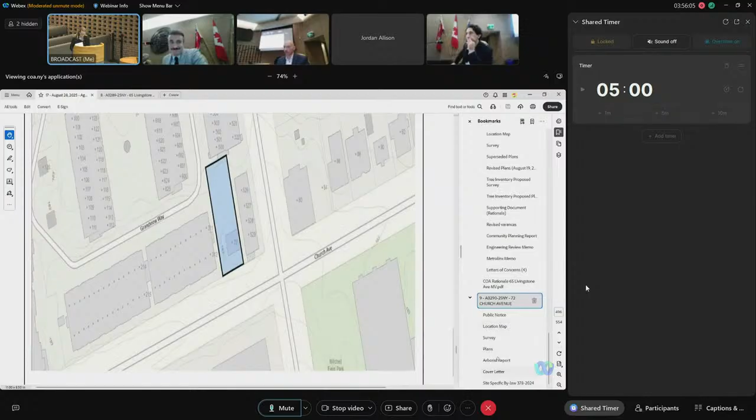We've got material from the applicant on file, and we have our agent in person. Thank you, Mr. Nipville.

Hi, good afternoon, my name is Mark Jacobs, and I'm attending virtually. All right, Mr. Jacobs, your address? Hi, my address is 37 Patricia Drive, Toronto.

The application before you is for some minor variances that have come to light as a result of preparation of detailed building permit drawings through our architect and structural engineer. This application received zoning approval last year from City Council, and we are currently working with finalizing the site plan approval application. In light of everyone's time, there has been some submission from City Planning, and the Committee of Adjustment Planner is requesting a deferral for this application.

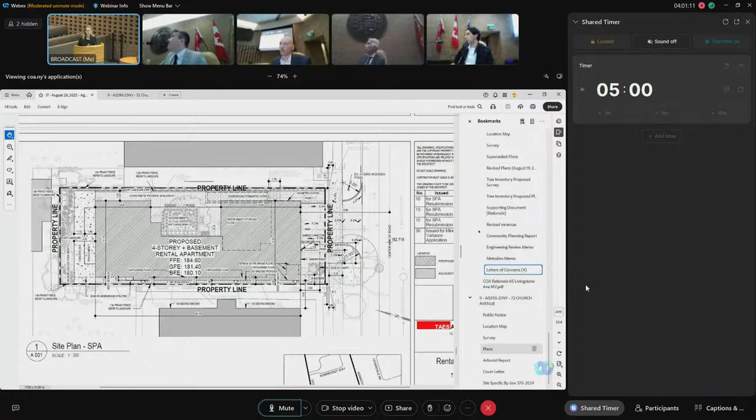On the application, it says that it's 14 residential rental units. And all of a sudden, on a website called VIP Condos, it appears that they're going to be for sale. So if that's a change, if it's gone from rental to condos, I'd like to flag that and see—I think some clarification would be helpful.

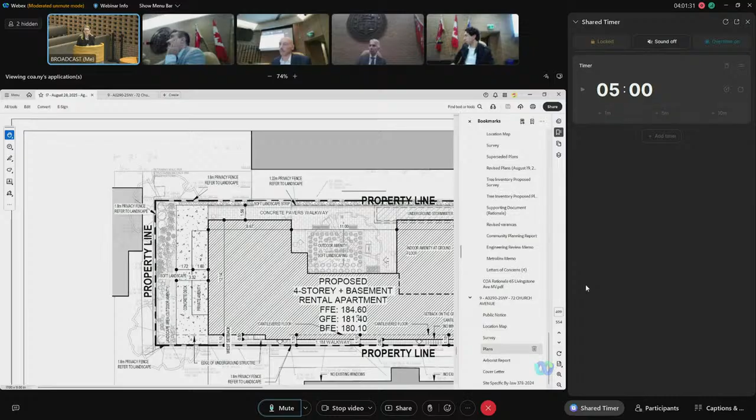We'll ask the agent. We're just going to speak to the deferral request, but I'd like to have more—the agent's listening, so they know that question. If it doesn't come up today, it's definitely going to come up at the hearing when we get into the planning rationale. But I'm sure it's on their radar now.

There's no timeline for that. It could be a matter within a month, whenever they're more ready. They will get scheduled in at the next available hearing, probably looking at a month or two. I've had 30 years of government experience—to make a commitment would not be prudent.

The committee is getting much quicker though, scheduling-wise—good to hear. So, anyways, and I'm just looking—

I'm going to go through all of the speakers unless nobody wants to speak, unless my neighbor—I'll let her address a question she has then on my time. But I'm happy to wait for the staff report and deal with this when it comes to deferral, and hope we're all around at that point. And you can reach out to staff as well as part of that discussion. I can reach out—getting an answer is never guaranteed. Okay, thank you, appreciate it.

We have some other speakers that came down today in the room.

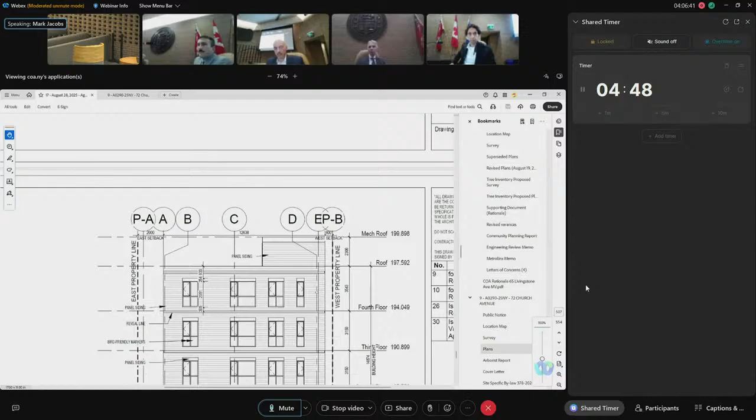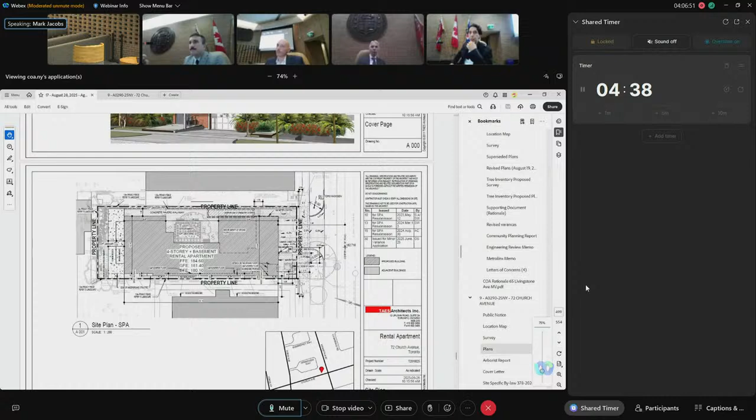If I may be given the opportunity to address some of those things while I have the microphone - in terms of the project being advertised as a condominium, I'll have to speak to the owner about that. I feel unfortunately a little bit blindsided by that because it's not my understanding. I'll have to clarify that before the next time this item comes back to committee. And with respect to communications on the variances, I have discussed it with the planner looking at the site plan approval application, but the discussion between that planner and the committee of adjustment planner have not occurred. So the discussion I had with the site plan approval planner was: let's get the applications submitted, let's get the zoning review done by staff, confirm the variances. Once it comes back to committee, we'll resume those discussions. And as I said before, I think because of vacations, those discussions have not been able to happen, but I'm happy to have the item deferred.

Okay, thank you. All right, let's take this into committee. Mr. Bartolo. Yes, thank you, Mr. Chair, through you - I'll put forward a motion to defer this application to allow the applicant and the city planner to communicate and work out any issues on the file.

All right, do I have a seconder for the motion? Mr. Nifil, all in favor? All right, a little lag on our screen there. Okay, no opposed, the motion carries. The application is deferred. Okay, thank you everybody.